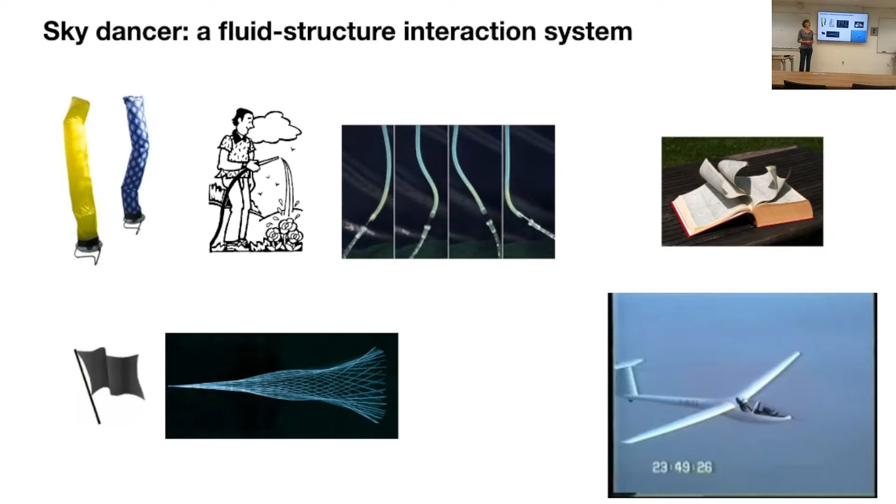This image is the superimposed image of the profile of the plate, seen from above at different times. Okay, so this is, I call it flapping or fluctuating or oscillating. This is the instability. Together, I mean, it would oscillate so much that it starts to hit. Okay. No.

Okay, and now the same instability happens in fluid conveying tubes. This is an old study made by Paidoussis, who is the person who developed this area. So for a tube, now the fluid goes through the tube with a velocity u. We have still 3 non-dimensional numbers.

So now we have the non-dimensional velocity, as in the previous case, the mass ratio between the fluid and the tube, and now we have the ratio between the own weight of the tube and the flexibility, the rigidity of the tube.

And in this case, when the tube is fixed from its bottom part and the air goes upwards, this is the case when gamma is negative. Okay, so we are in the configuration when the tube is like this. The air flows upwards, and so when we increase the velocity,

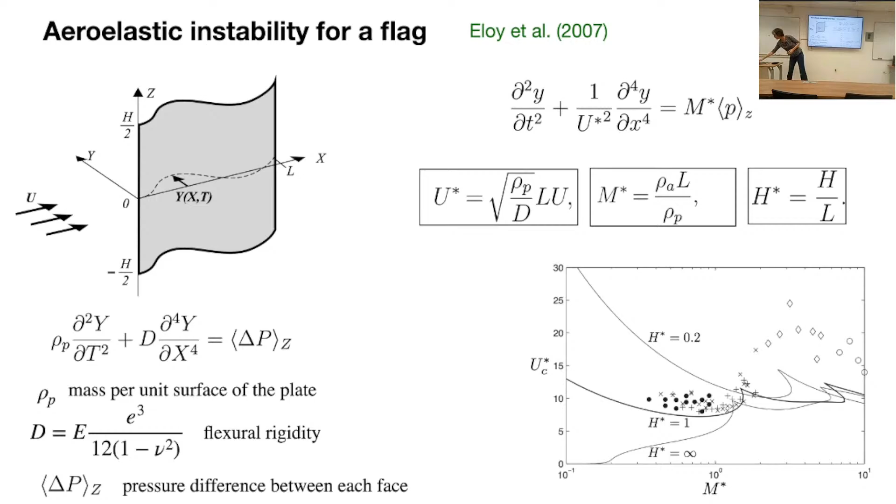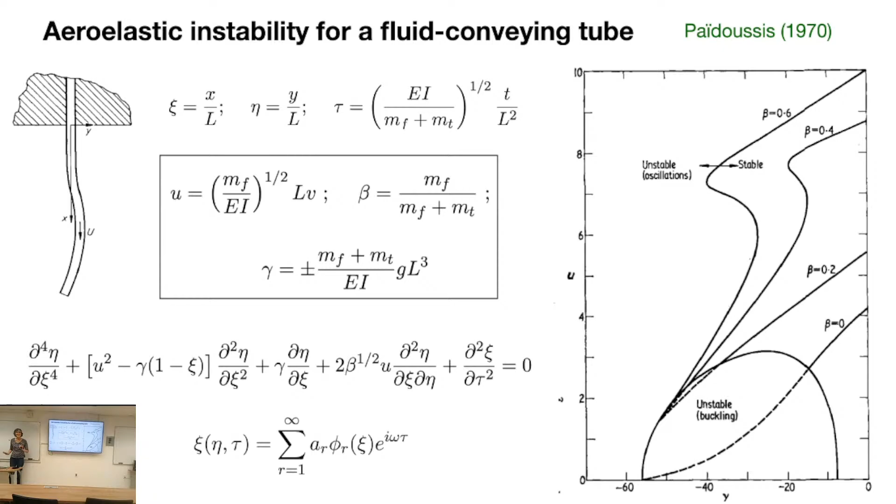Okay. These are the only equations I will show today. Now there are experiments. So with the sky dancer, we made a small sky dancer that we can have in the lab. And the difference between the sky dancer and the flexible tubes which were studied before, is that the flexible tube may curve, but the soft tube, which is made with plastic, with fabrics, can fold, completely fold. Okay, this is the main difference.

So when I switch on my air pump and I begin with a low velocity, the tube collapses because there is no air. When I increase the velocity, the tube rises, and for higher velocity values, the tube will dance like in the street. This is a plastic fabric. These fluctuations, this is the case of the last picture. Yes. I will show a video now.

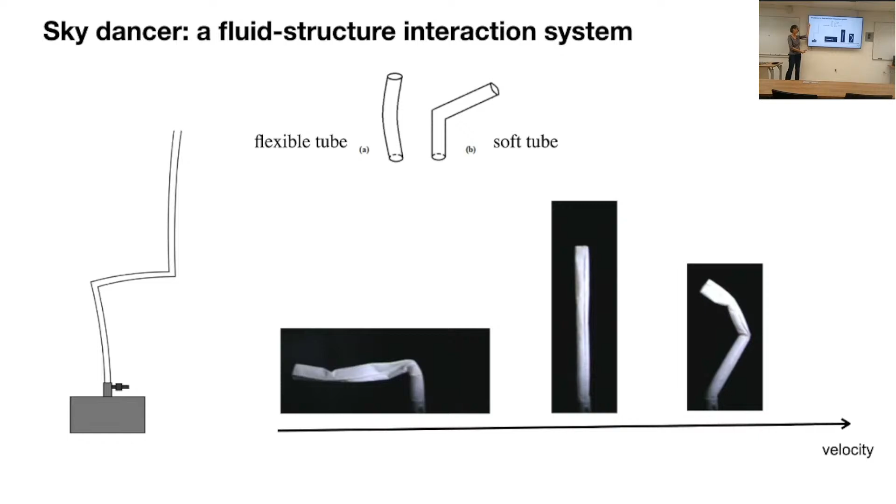And to know if this kind of soft tube behaved as a flexible tube, it was difficult because of this state. So we chose to put the experiment upside down. Like this, when there is no flow, the tube is straight, so it begins to fluctuate from this straight state, and we were thinking it would be easier. Okay.

So we put the air pump fixed to the roof, and we switch on the air, and what we see is this kind of fluctuations, which do not seem periodic, they seem chaotic. And for this configuration, this is a long tube, longer than 1 meter 20 centimeters, diameter 1.6 centimeters. We saw this kind of states.

And here for the video, I chose a state which remains a few seconds, but the tube may remain like this several minutes. And this is at the same speed of the airflow? Same. Or is the velocity changing continuously? No. Okay. This is a thing that I will speak about.

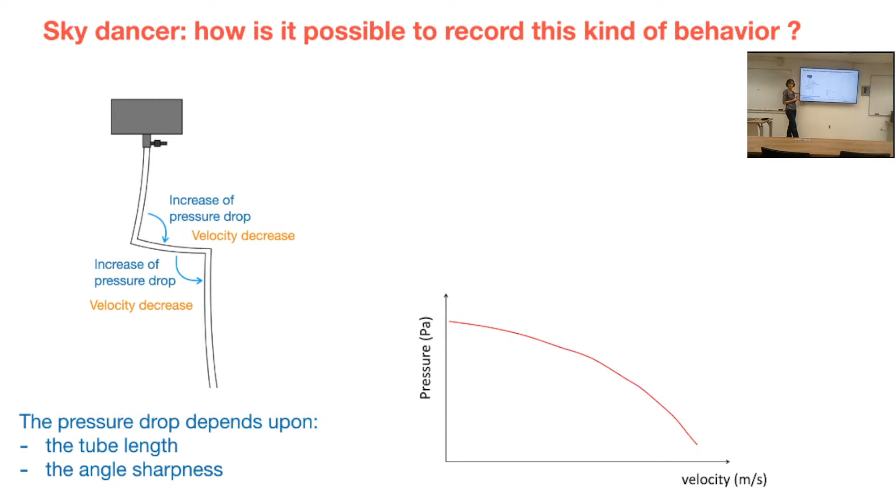So what we know is that at the pump exit, when the tube is long, there is a pressure drop. That is to say that when the tube is long, the pressure here at the free exit, at the free extreme of the tube, is equal to the atmospheric pressure, and the pressure here must be higher, so that there is a flow which goes from here to here.

And moreover, if there are folds, like here and here, the difference of pressure between this point and this point increases. And the pressure drop is higher when the angle is sharper, right? So if the angle is sharper, the pressure drop is higher, okay?

So what we did is to put a pressure sensor here and at the same time a hot wire anemometer. So we could measure at the same time pressure and velocity, the air velocity. And what we observed is this kind of curve. Pressure is the blue curve and velocity is the red curve. So this is pressure and velocity when the tube fluctuates.

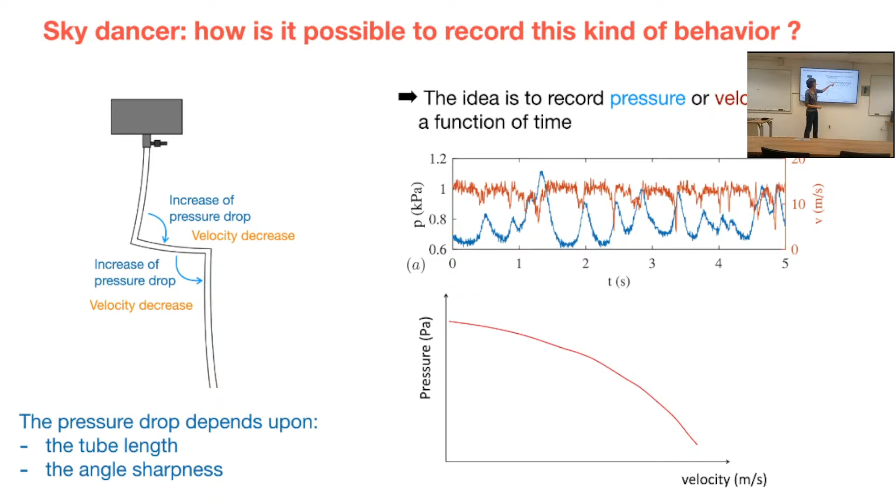What we see is that pressure increases and decreases. And when the pressure is high, generally the velocity is low. Okay. It's logical because when the tube folds, the pressure will be higher because the pump must use more pressure to evacuate the air, and the flow is obstructed, so the velocity decreases.

Okay. So when the pressure is high, velocity is low, and this is coherent with the characteristic curve of a pump. The characteristic curve of an air pump is this one. So I can put my hand here at the pump exit to prevent the air from flowing. So I exert a lot of pressure and the velocity will be 0. And if I let the exit free, the pressure is 0 and the velocity is maximum.

So for the same electrical power, there are all these states which are allowed as a function of what happens here. Okay. What I do when I change the pump power is to change this curve, but I don't control the velocity inside the tube. No.

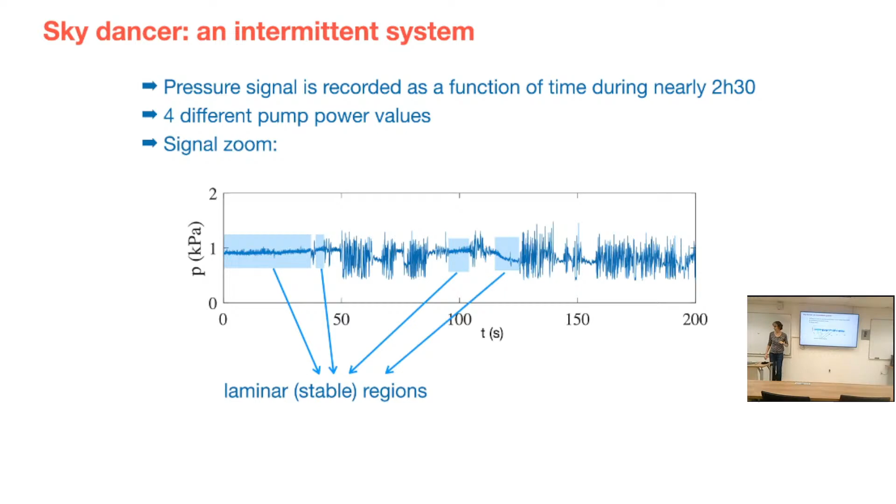And these regions, the turbulent phases. So this kind of regime is called intermittent regime. It is one of the three classical routes to chaos. When a system is laminar or periodic or static, and we increase the control parameter, classically the system can take three different scenarios to reach chaos, and intermittency is one of them.

So here we increase the pump power, and here are the four different pressure signals. We see that when the pump power is low, the laminar state is long. Okay, the tube does not fluctuate a lot. Then it will fluctuate and come back to a laminar state, and so on. When the pump power is increased, the laminar state is shorter, and it alternates between laminar phases and turbulent phases. And for the higher value of the pump power, the signal is turbulent, and there are very few laminar regions here.

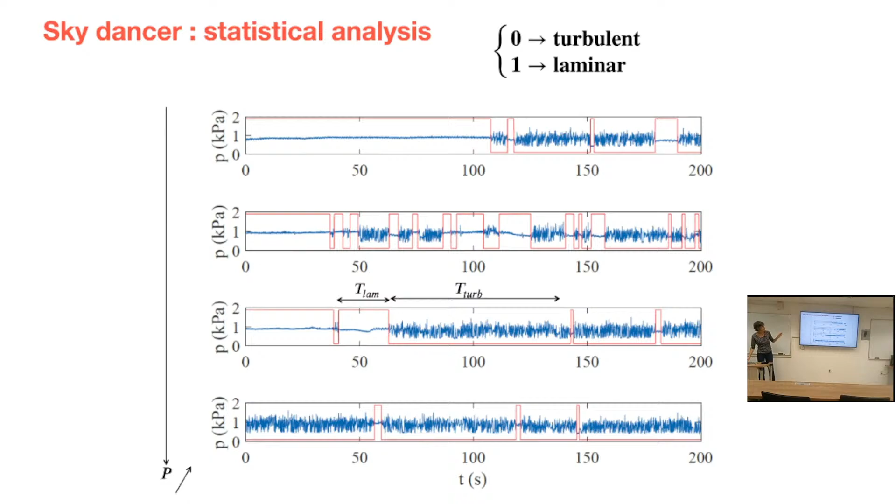So we binarize the signal, and the laminar state stands for 1, and the turbulent states, when there is a fluctuation, we put to 0, and we will measure the laminar durations and the turbulent durations, and we will do statistics. So we do it for the 4 signals. And what we see for the laminar duration is this kind of histogram.

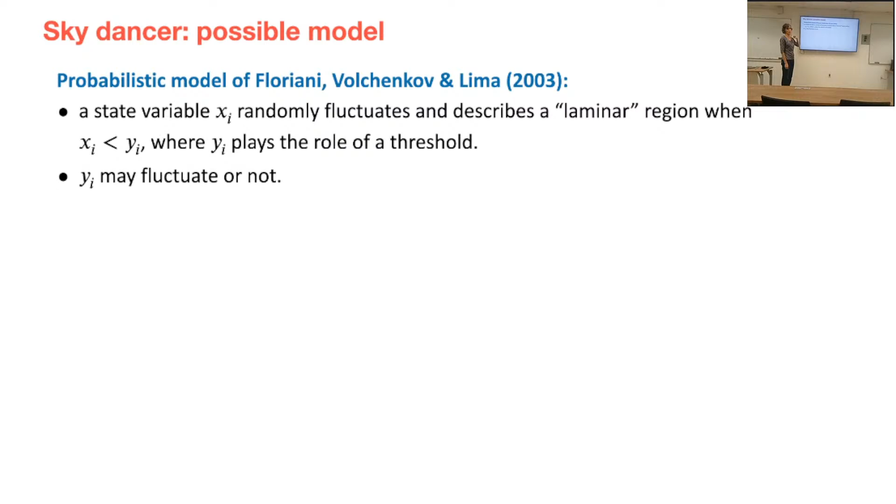And the new ingredient of this work is that the threshold may fluctuate or not; the threshold can fluctuate with a probability. I will show you a diagram after that. So the state variable x belongs to this interval and has a probability distribution which is exponential, and y has another probability distribution. Now we have a parameter mu, which is a probability which allows the threshold to vary. If mu equals 0, the threshold always varies, and if mu equals 1, the threshold never varies.

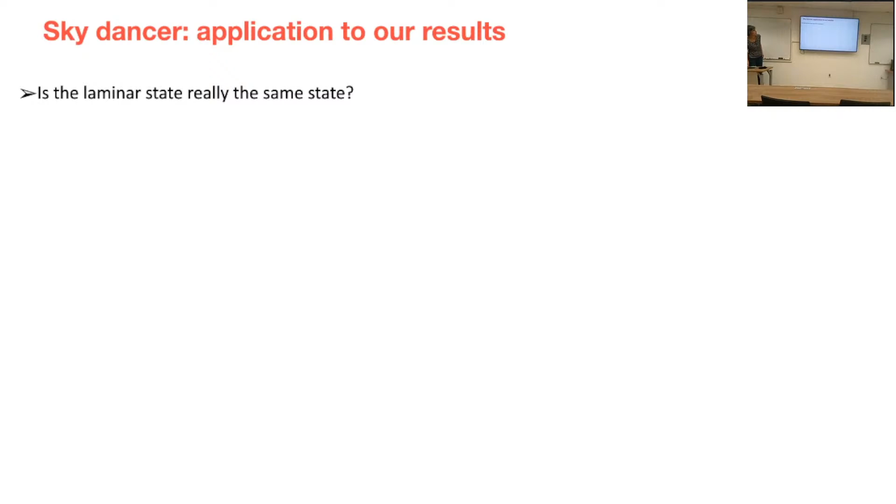So what we did is observe the laminar states, and as I told you before, we see that the tube stays in the zigzag shape, which differs from one zigzag shape to another. If we measure the mean value of the pressure during the duration of the state, we see that the pressure for this shape is higher than the pressure for this shape because of the angles. The angles are sharper, so the pressure is higher.

So we wondered: we considered that there was only one laminar state, but we could consider that the laminar states are various in the experiment. This is a histogram of the mean value of the pressure of all the laminar states in our experiment for the lowest pump power value. What we see is that there is a maximum here, and here there is a very small maximum.

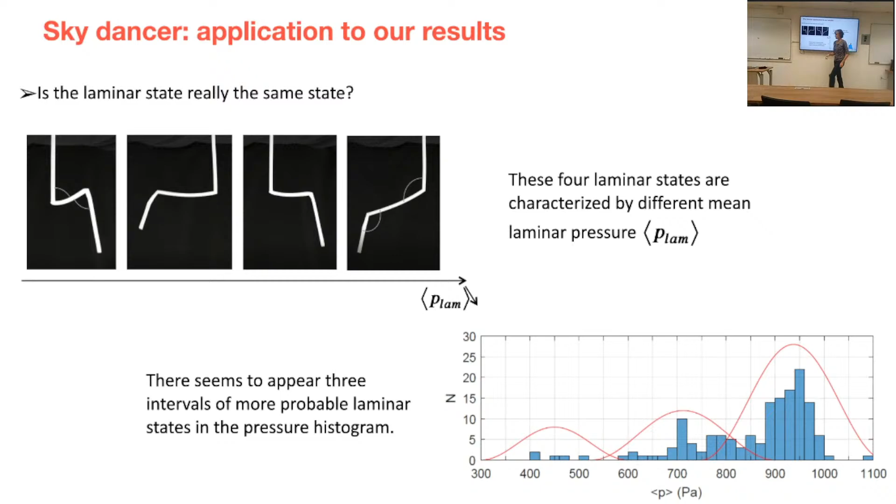And we chose to say that there are more or less three laminar states which are separated. We can distinguish them by the pressure. So what we did is to take again the pressure signals, and now, as a function of the pressure value of the laminar state, we consider if the state is 1, 2, or 3.

So laminar state 1 is for low pressures. Laminar state 2 is for intermediate pressure values. And laminar 3 is for higher pressures; it corresponds to sharper angles. And we have the turbulent. And if we do again the statistics, we can see that for all the pump powers, the lower pressure value,

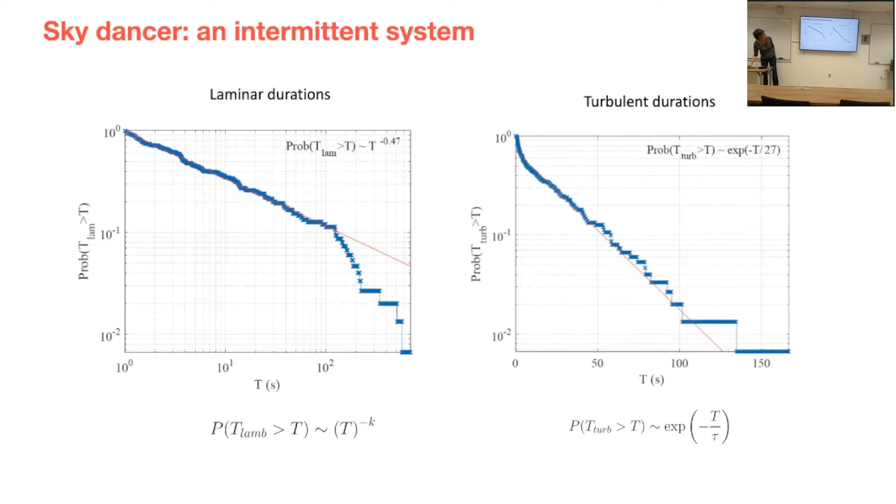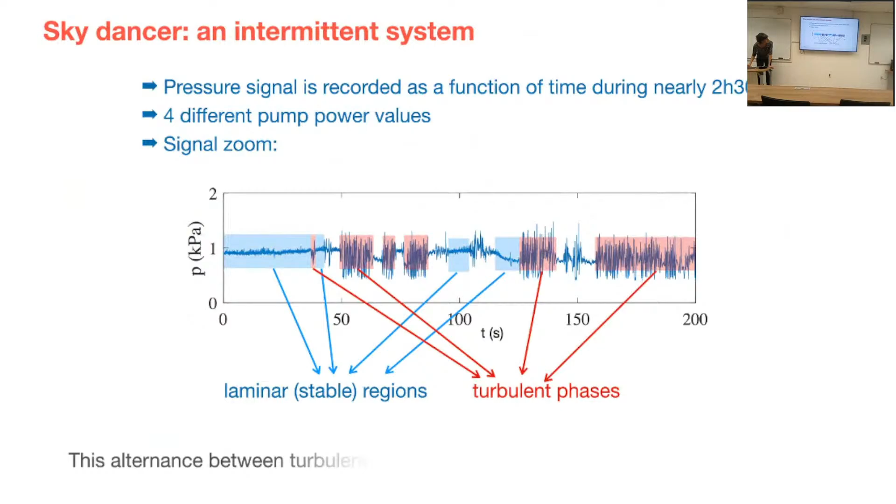Where was it? No. Oh, I get lost. Oh, excuse me. Ah, this one.

So this one will stay like this a short time, and this one has more probability to remain like this a long time. That's what this kind of histogram shows. And we can see that each one of these states has its own distribution. And these are the K values.

So for the smallest pressure state, K is very high. It means that the times are short. And for the intermediate state, K is intermediate. And for the third, this is the state which has a longer life.

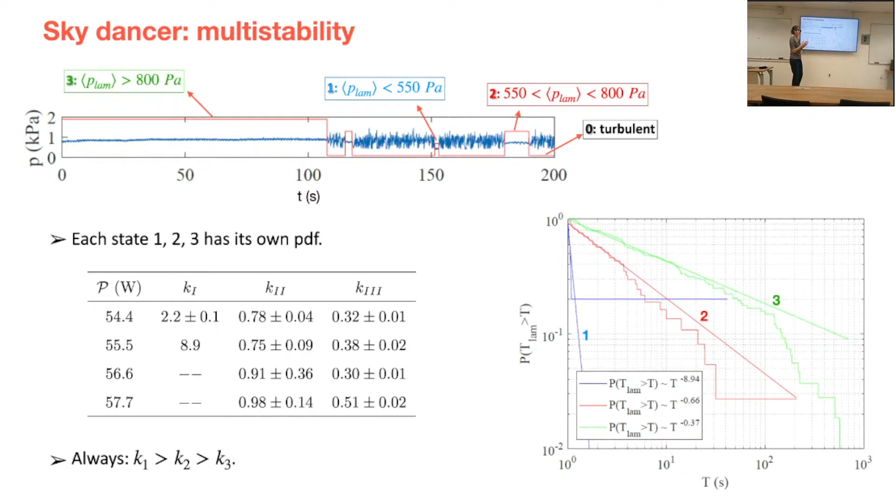So this is the conclusion of this work on intermittency. What we did is to interpret the different distributions of the turbulent and laminar states, and we found that the laminar regions are constituted by 3 different states which have their own distribution. So this is a work which has been published.

And I don't know if you have some questions. It is difficult, or I don't know.

I just was thinking that for the stable states, the one which has the lower pressure, it may be that the reason it lasts the least is because of gravity, because it has wider angles, so you have more torque in the legs, to say something. So maybe gravity plays a role there.

Lasts the least. I don't know if it has more torque. I would say that it depends more on the deformation of the tube. What we were observing is that when the tube was very deformed, it could be more stable because of the material. Yes.

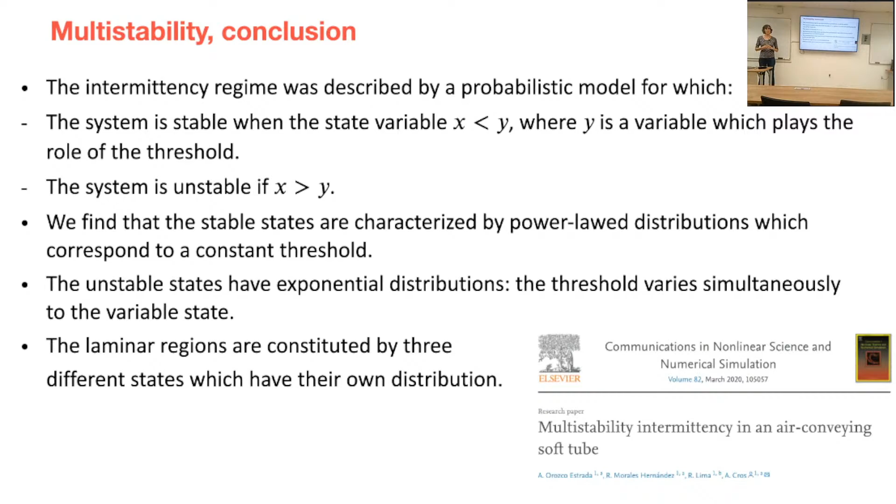And now, if you want, I don't know if I have time. Yes.

Okay. So Jose Carrera asked, when binarizing your signal, how do you decide that there is a turbulent behavior? Because it depends on the scale. If we look close enough, all we will see are fluctuations. Okay. To binarize the signal it's always a subjective criterion. So I chose a criterion to binarize the signal.

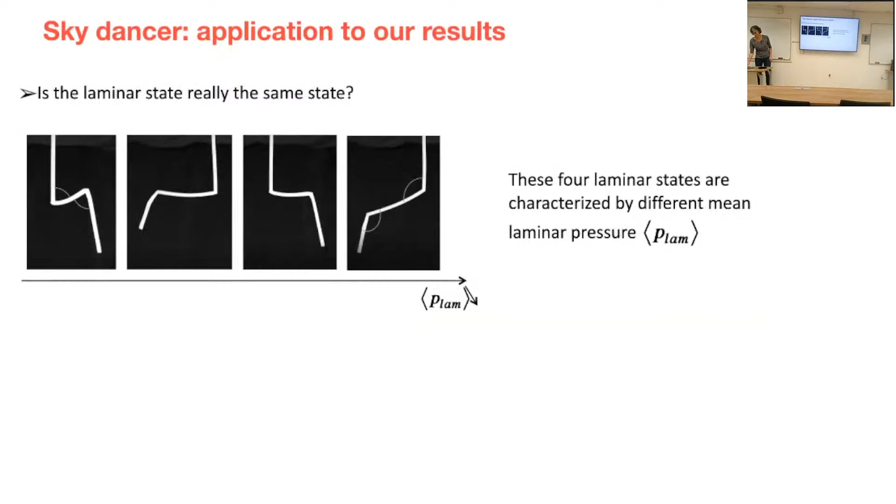I don't remember exactly what we have done, but indeed, with this criterion, we will miss some laminar states, and sometimes we will consider some turbulent states as laminar. It's like this, but we finally chose criteria so that as much as possible we agree with what the signal gives. It's subjective. So I don't know if it answers the question.

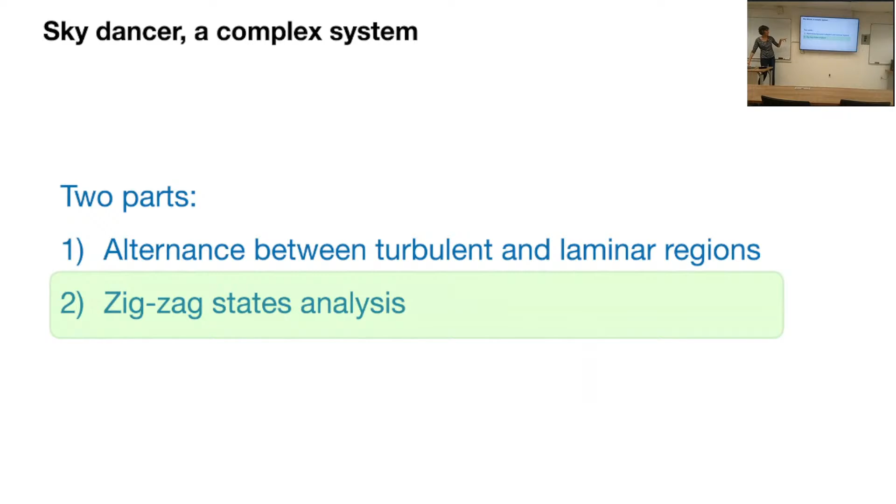So now what we want to do is to model, to analyze the zigzag states. So here, what we want to say is that these zigzag states are the first time that we see this kind of states in the system. I spoke about this kind of system in the introduction.

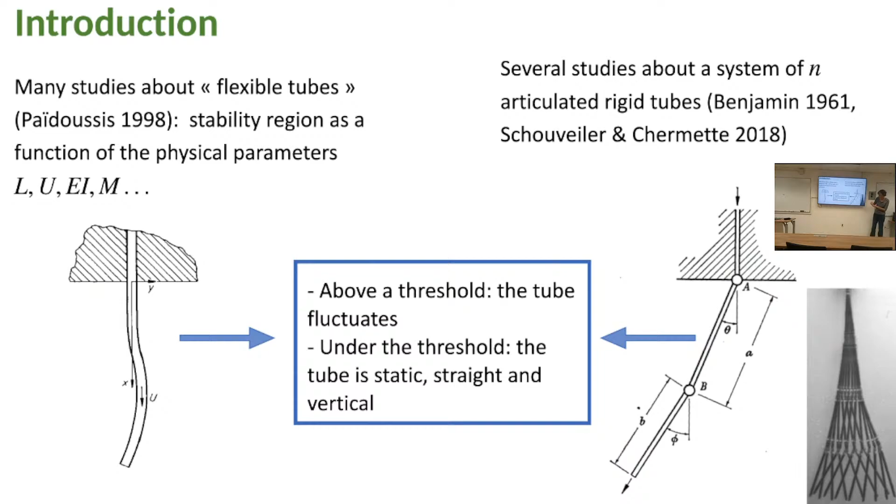A study which is similar to the flexible tubes is a system of n articulated rigid tubes. So there are rigid tubes, a fluid conveyed inside them, and articulations. The first theoretical study was done a long time ago, but there is an experimental study done a few years ago with 5 rigid tubes which are held by plastic articulations.

So what we did experimentally, this is the master thesis of Oscar Donato. We have the pump here, the tube here, and he was taking the tube here and moving it. And he let it go, and observed if it is stable or not. When it is stable, he takes a picture, and when it is not stable, he tries another length and other angles.

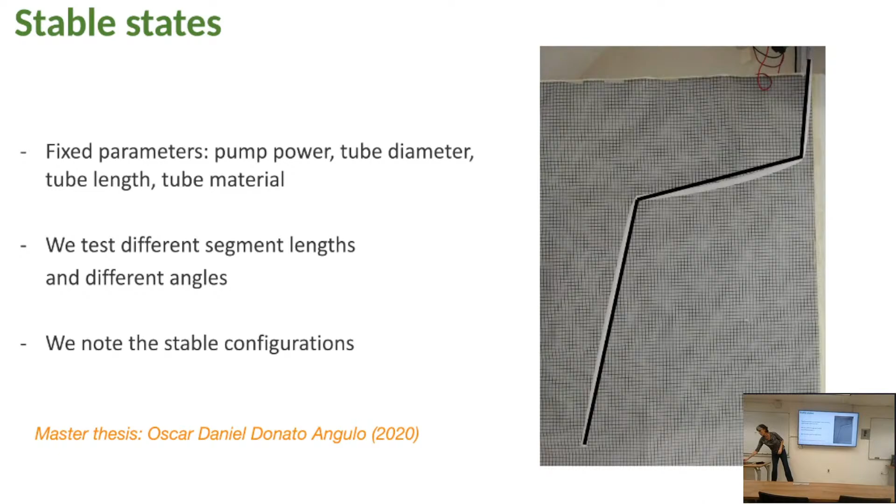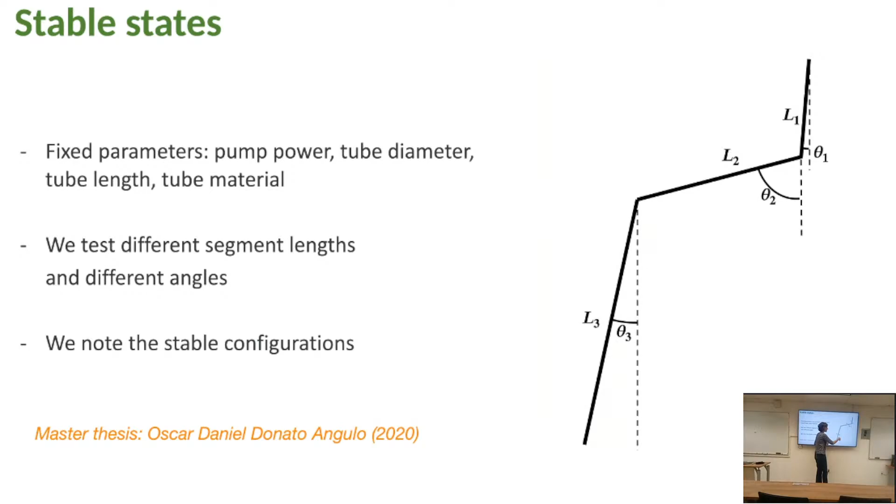So what we observed is that the tube, when it is stable, always has 3 roughly straight segments. So we can characterize this profile thanks to L1, L2, and L3, the segment lengths, and their angle with respect to the vertical. And we note it in the computer.

And here we plotted the stable states. So these are the zigzag states. And we need only 2 parameters, because if we know L1 and L2, we know L3, because the total length of the tube is constant. So what we see here is that a great range of L1 is allowed. We can have from 0 length here to 80% of the total length.

For L2, the range is smaller, because for L2 we will see that this angle is higher, so it costs a lot of energy to incline this segment. So L2 can go from 10% to 40% of the total length.

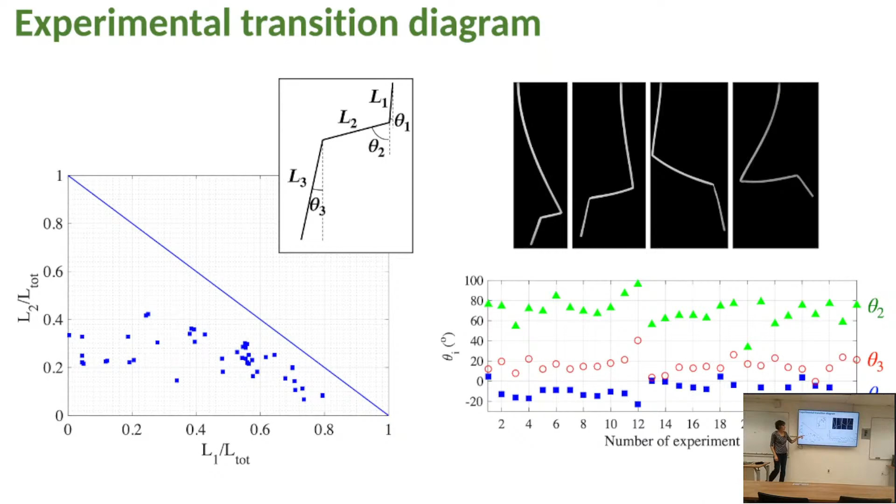And for the angle, what I was saying is theta 2 is higher than the other 2 angles, and theta 1 generally has an opposite sign to the other 2. That is to say that theta 1 goes leftwards, and theta 2 and theta 3 go rightwards. Okay, so this is to balance the weight of the system.

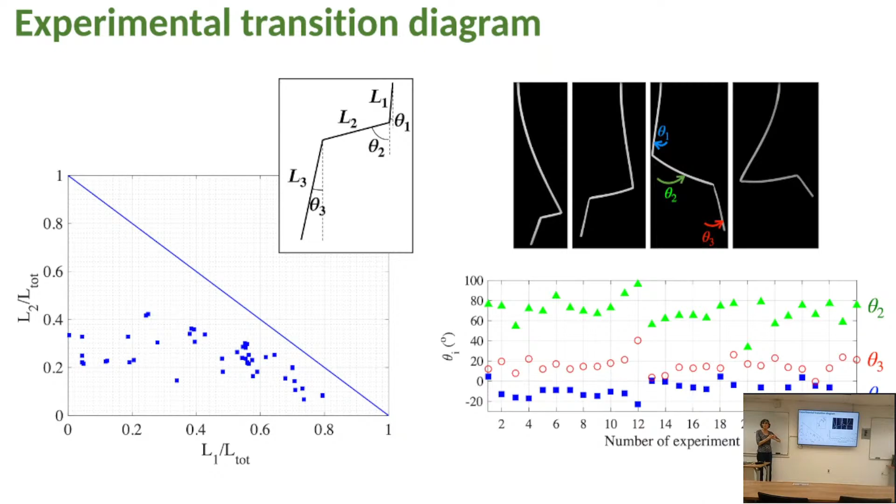And now to model this system, Eloi, the author I spoke about before, proposed to model this system with a system of 3 articulated rigid tubes. So this equation was established by Benjamin in 1961, and L is the Lagrangian. And the total Lagrangian of the system is the sum of the Lagrangian of each segment. Okay? And the Lagrangian of each segment is the kinetic energy minus the potential energy. And the kinetic...

That in the articulations there is no change in the pressure, then the flow goes straight? Yes. The flow does not go straight. It does. I mean, it means that these Lagrangians do not depend on each other, or they do? I mean, is there interaction between the distinct segments of the tube? They are connected, so there is a physical connection. That doesn't have to do with the equations of motion that appear there. Well, finally, if this one oscillates, this one also will oscillate.

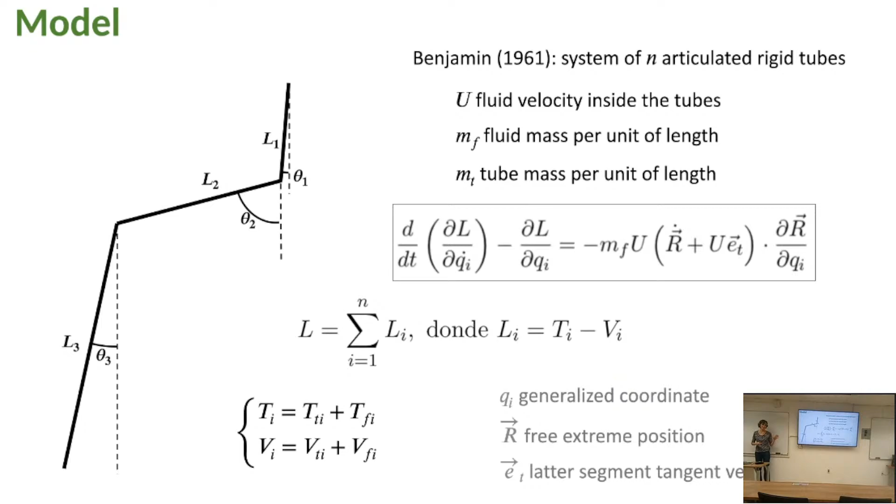So we did the calculation. It's not very difficult, but it's a large equation. We put it in MATLAB, and MATLAB can solve the system of equations. And now, in order to see the zigzag state, because if we leave the system like this we won't observe any zigzag state, what we added is a torsional spring at each articulation.

So this torsional spring comes from the fact that the tube can fold, and to estimate this spring constant, we consider that we fold the tube and we calculate the weight of this portion and the angle at which this portion was inclined. So thanks to this, we can estimate a torque, and we will fit the experimental torque with this kind of law, because there are 3 advantages.

The first advantage is when theta tends to 180 degrees, that is to say that the fold is complete, there is a divergence, because experimentally it is not possible. When theta tends to 0, it's linear, because generally for small angles there is a linear behavior. And this expression is integrable, because we will have to integrate tau to have the spring potential.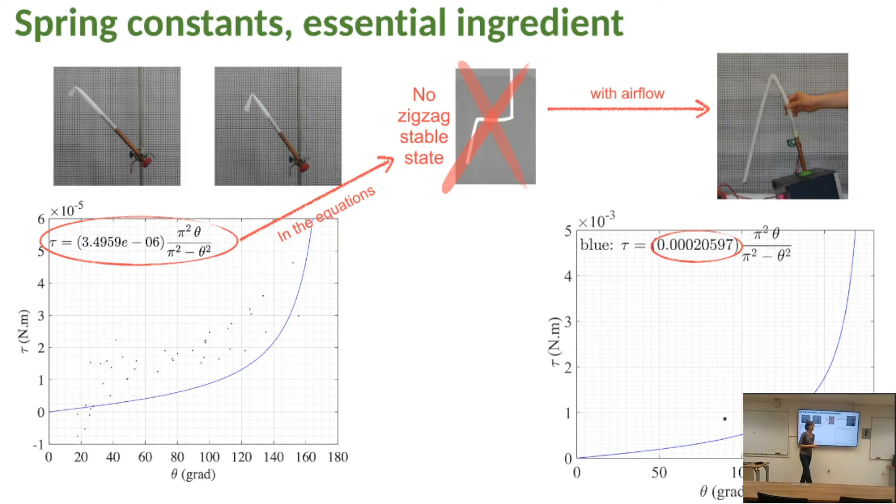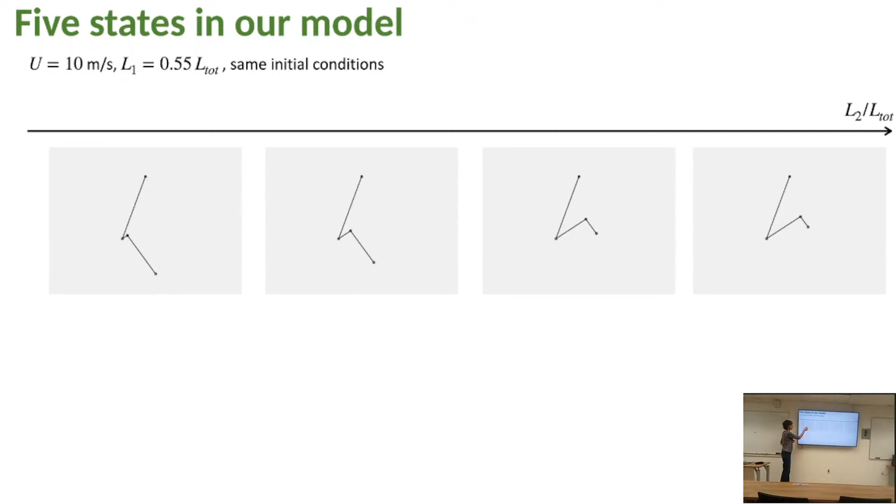And when we put the potential here in the model, we found different regimes. So these are the simulations for a constant flow of 10 meters per second. This segment has the same length, and we change only the length of the two bottom segments. So when L2 is small, we see that the system tends rapidly to the straight vertical state.

Now I increase L2, and what we see is that the system oscillates without damping. And the third configuration is what we wanted to see. Okay. So we found the zigzag state, and if L2 is higher, the zigzag state is not stable anymore.

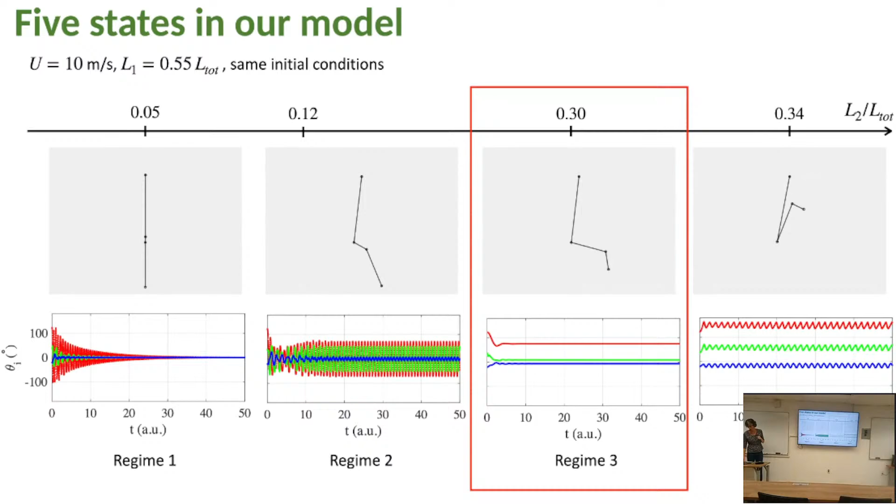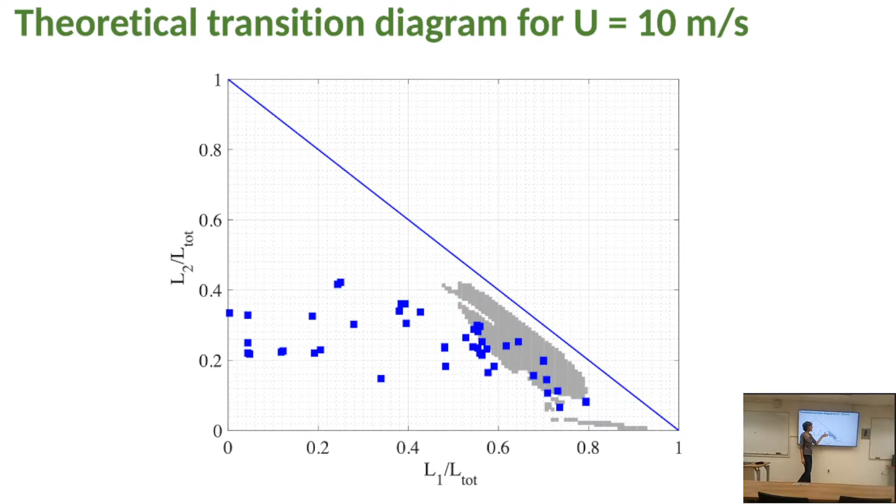So now we explore all the values of L1, L2, and L3, and this region is where we found a stable zigzag state with our model. So it's a little bit different from the experimental data, but this is a new result. And as for the angle, the model gives an angle which is similar to the experimental data.

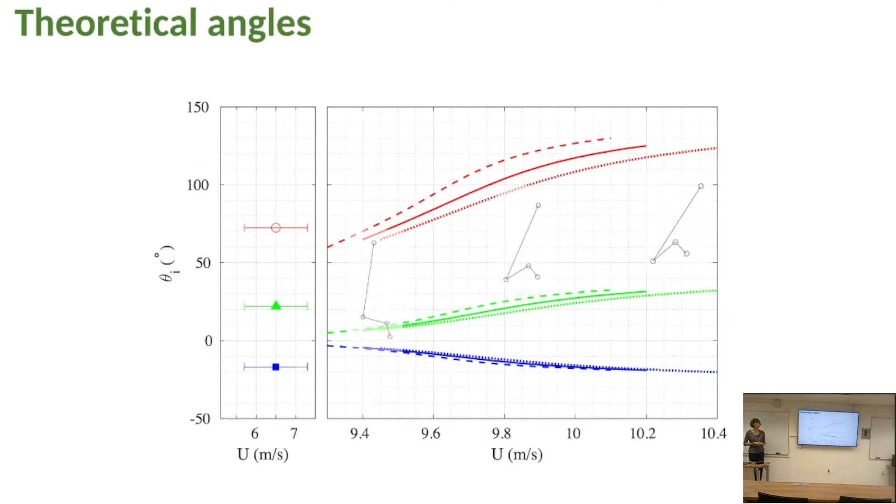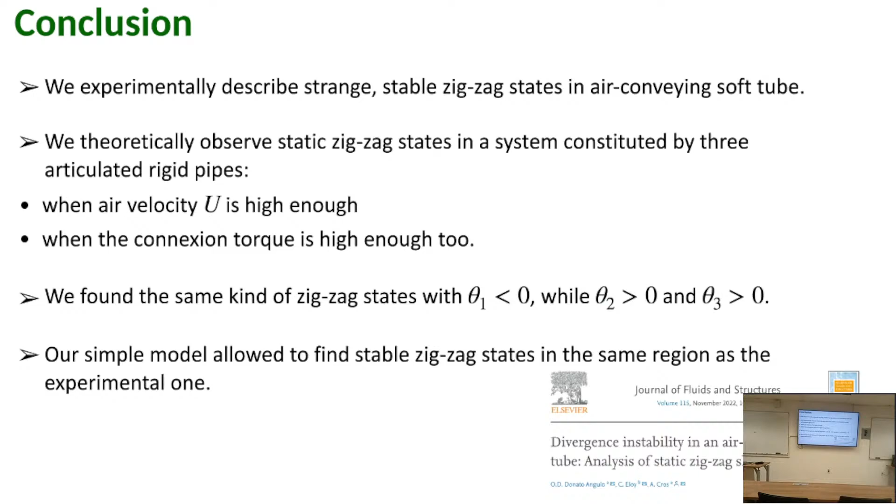So the conclusion is that we experimentally describe these zigzag states, and we could reproduce them thanks to a model which is constituted by 3 articulated rigid pipes. And this model shows a great variety of regimes. So that's all. And the last thing I wish I could find: I hope I could explain this kind of wave which travels along the sky dancer.

Somehow you changed the power only a small amount. Yes. Double the power, for instance, or you did not want to, or you know what happened? To increase it, it was more than 95% of the time in the turbulent region. So it's a small region. Yes, very small, where dynamical regimes can be observed. Yes, the transition is abrupt.

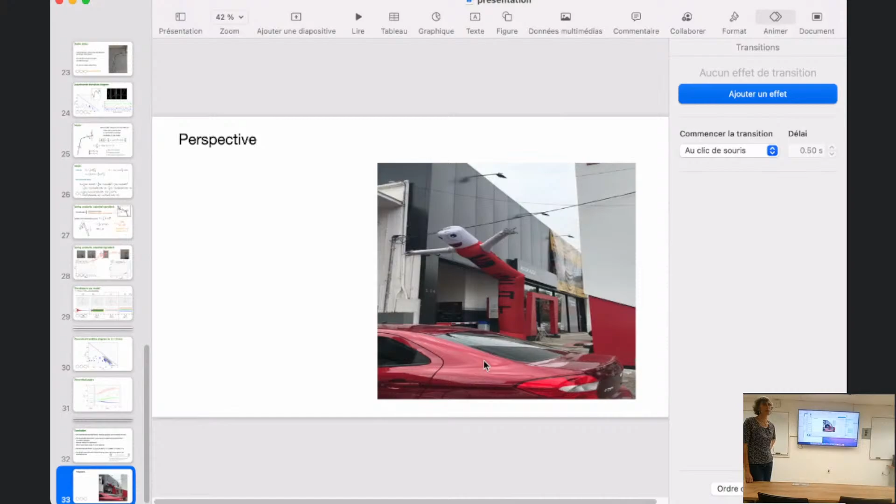I have one. So, in this paper, you mentioned what you used for doing your simulations in the first part. I guess this idea of getting these random variables from exponential distributions comes from them, or not? I mean, have you considered using random variables from different distributions to model these xi and yi? I don't understand the question. You ask if it is a random process or?

So these x and y in the first part, when you put your laminar and your turbulent regimes, you give them if you were above or below this threshold, but then you randomize. These are random variables that you get from this exponential distribution. Yes. And then with that, the model. Yeah. But you are using exponential distribution. Yes. What would happen if you use something else, for example? The author told me that they tried with another distribution, but I don't know which one, and they found the same kind of behavior.

If no, I have one question. Okay, so if you increase your pump power, is there any regime where you cross some critical value of the pump power, and then your distribution of the laminar time is not power law anymore? Just above the. It's possible, but it's hard to find the exact pump power value. Yeah, more or less a pump power value.

My point is, does a regime exist in which this distribution of the time for the laminar motion will not be power law anymore? Then you can say that there is a crossover or a dynamical phase transition going on. Why do you say that? I'm asking if there exists. We didn't observe it. To answer, I should do perhaps another experiment with a lower pump power, but it's a delicate experiment because if I change a little bit the pump power, it's all quiet, or it's, yes.